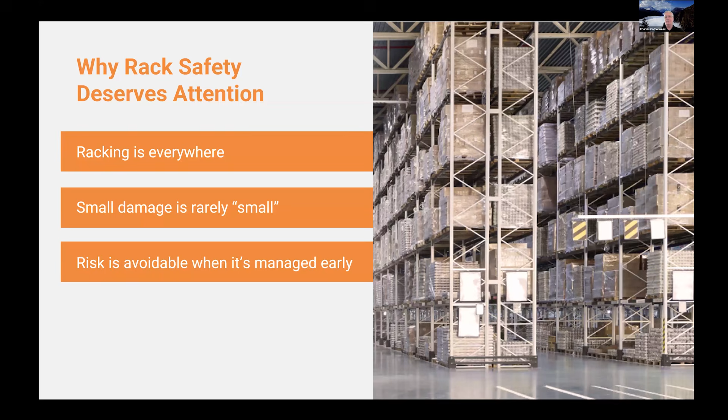And risk is avoidable when it is managed early. So if there's anything you need to remember from this presentation, these three points are the crux of it. At the end, we talk about some of the solutions to this.

Damotech is 37 years now. That's why we say built from 35 years of rack safety expertise. We were established in '89. So decades of real-world inspections. We're the largest rack safety provider in North America.

We sell engineering products for warehouse protection and rack repair. We have engineering services, rack inspections. We do reverse engineering to figure out load capacity, especially for those people who have multiple different types of racks and different manufacturers through the years in their warehousing. No rack manufacturer wants to calculate and provide capacity for its competitor. So we go in - we are not a rack manufacturer - and we have the engineering tools to calculate all of these different systems. We also provide rack safety training.

As I mentioned, there's a thirst for learning more and more about the domain. So the outline of the presentation is truth from the field - this is where you benefit from the 35 years of being in there. A quick reality check, then some of the lessons that we extract from the field, a few key takeaways, and then Q&A. All that in 45 minutes to 1 hour.

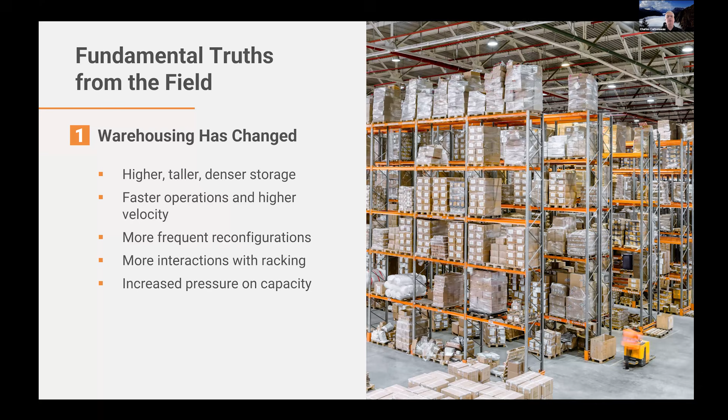So fundamental truths from the field: number one, warehousing has changed. That was really common from our own employees and from the field - things are moving along. Rack systems are higher, taller, denser, with faster operations and higher velocity required of you. More frequent reconfigurations, change of seasons, adaptability of the racking systems to what needs to be stored, more interactions with the racking in the sense that you visit these slots often and faster, and therefore they're exposed to more possibility of damage. Increased pressure on the capacity of the racking system - it's got to be fully available all the time because that's how you plan to use it.

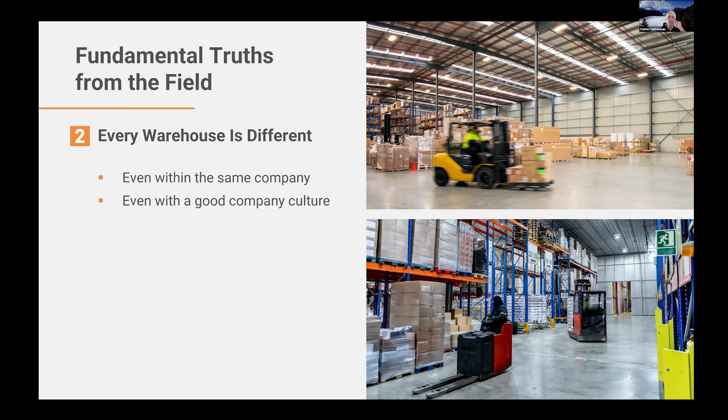Truth number two would be that every warehouse is different. This is something we realized through the years. We can't come to you and say there's only one solution, only one way to approach it. Each warehouse is different, even within the same company. Companies that have a widespread footing in North America, for example, depend sometimes on local culture, different employees, different approaches to safety, different sensibility, also different pressure. So even with a good overall company culture, we can see these differences, and we have to be sensible to the fact that uniformity is almost unattainable on a person-to-person approach.

Truth number three, and we're really going fast - this presentation, by the way, is going to be available as a video, I believe, after we finish. So everything is accelerating. You need to be able to make faster decisions. We have lower tolerance for downtime. If you close an aisle and can't access it, it becomes critical at one point. If it's closed off, it must not be for that long.

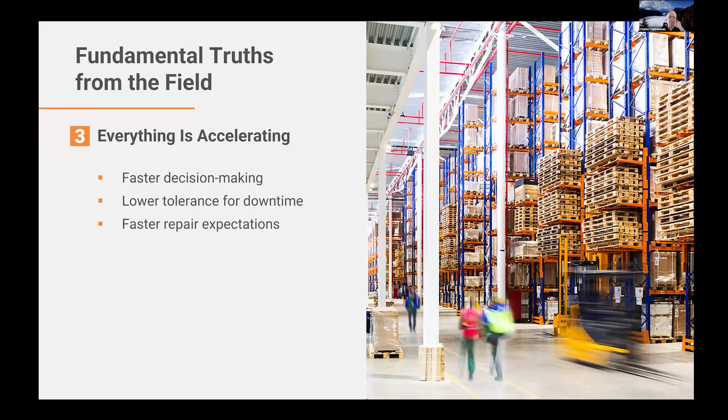And so there's faster repair or replacement expectations, of course. And another really fundamental truth: if you use forklifts, you have rack damage. And even for the ASRS, the automated storage and retrieval systems, we're being asked to inspect those. Sometimes it's more the insurer that wants to make sure everything is safe, and so we do these types of inspections as well.

The conclusion of this is that damage is normal. Even with robots, we can see some damage. A little box that you tried to store twisted somehow, you try to retrieve it, push it into the rack, and you damage the ASRS. And of course, if we have humans driving forklifts, 3,000 pounds of forklift carrying a 2,500-pound pallet, sometimes you don't even feel that you're damaging the rack because you're so heavy.

So damage is normal, and unmanaged damage is dangerous - the accumulation of it. Fundamental truth number five: complacency is expensive. It's easy to say, but we've lived it, we've seen it. Planned maintenance is at least predictable, and emergencies put you in trouble. When you come to work and you're only extinguishing problem after problem, fires left and right, you know you're not in control. This has a cost because you're not doing the other things you should be doing.

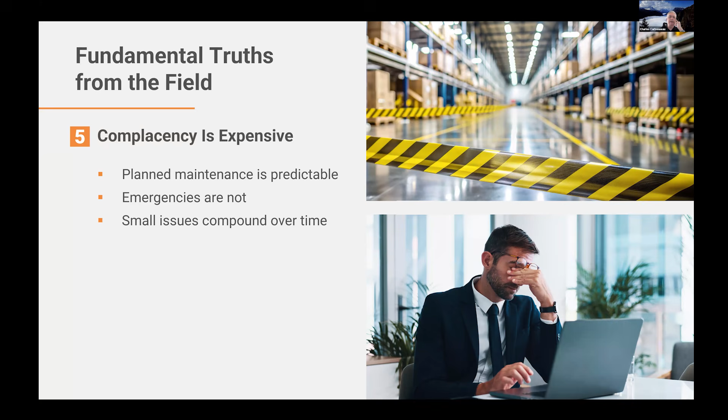So taking hold of not only damage, but conformity of the racking system, you're at peace. Everything's under control, there's a system and it works. Small issues compound over time, definitely.

Truth number six: under pressure, safety culture erodes. And everybody has to agree that it's kind of the first thing that'll be pushed aside. When there's staffing shortages or large turnover, you have to retrain everyone, and you're not going to get the expected results systematically. It's kind of hard to get there, and there's no magic formula for this.

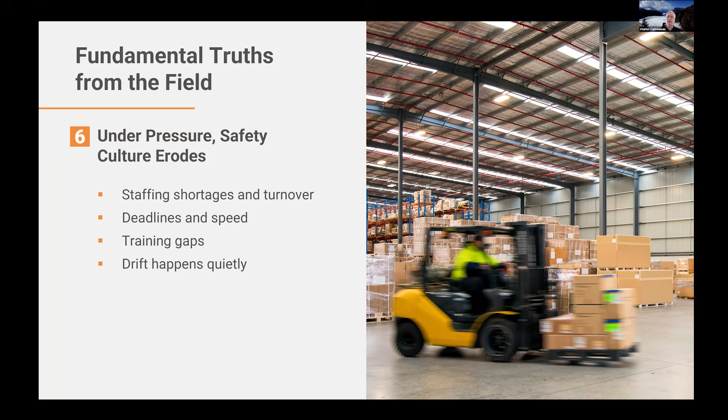Deadlines and speed, of course, put pressure on safety, and I mentioned training gaps - if you have large turnover, that becomes difficult. And drift happens quietly. Meaning, you had a safety meeting one week that was planned, but then there's an urgency the next week, so you push it back, and yeah, there's something else. If two weeks go by and you're not looking into it, well, it kind of gets pushed aside because we have other things to do which are more important.

Number seven: good intentions don't replace a program. So I'm going towards the practical solutions, which is to have a system in place. Right now, a lot of people have damage and need to fix it when they at least know about it, because a lot of the time, if you don't have any system to report it to a manager, they just don't know.

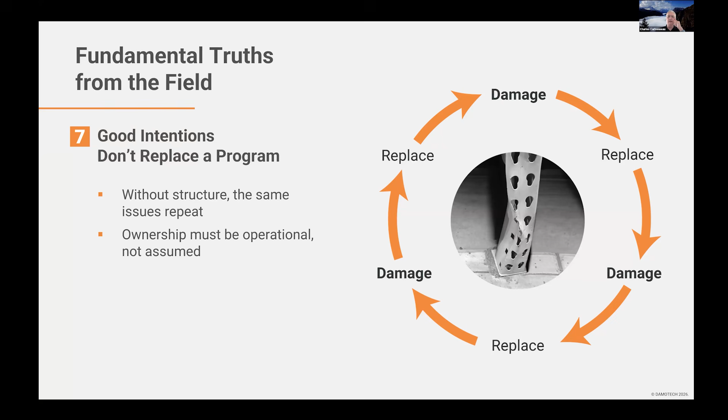So you damage, you replace or repair, you might have damage again, and you replace - damage and replace - and you just spin around. At one point you wonder, didn't we fix this like two months ago? Why is it back? So that's the point: without structure, the same issues simply repeat. And ownership must be operational, not just assumed by the people in place. Because you have to extinguish fires left and right - at one point, is anybody taking care of that? Follow-up is really the missing link.

The nut of the anchors is not tight. So what's going to happen? The rack is not going to fail. There's not much excitement, seismic forces there. So it might be a low priority. In a high seismic zone, it's a high priority suddenly.

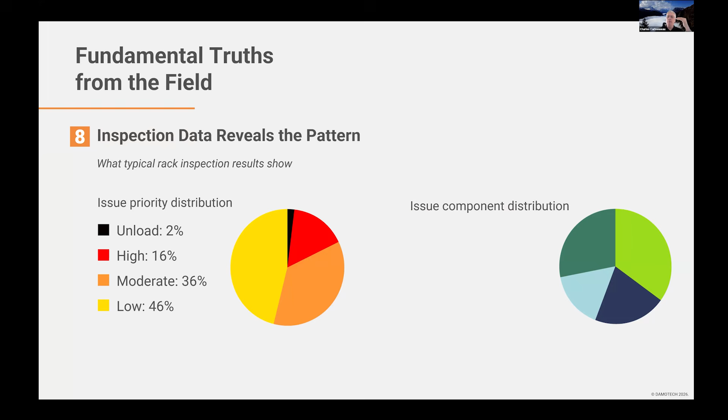So what you're seeing here is overall. Now, in the issue component distribution, braces are a big issue, like 35% of what we see. Then beams, then columns, then the rest. Like the rest could be, like I said, the anchors, or there's some out of plumb on the uprights, or there is some missing safety pins, stuff like that. But when you look at this, 35% braces, 21% beams, and 16% columns, that is kind of the representation.

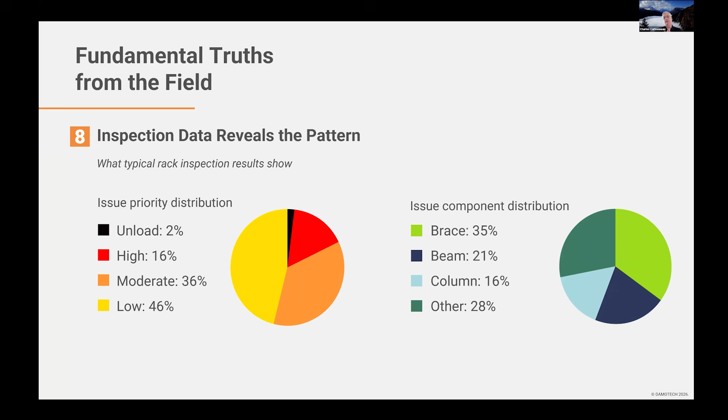of the distribution of these elements within a warehouse. You have many braces in an upright that has only 2 columns, and you have more beams than columns in an upright. So it really talks to the fact that because you have more of them, they're more exposed, and that's why you damage them a little bit more. Now, if you have outriggers and you're using double deep systems, beams get a beating very often. There are solutions to fix that, but you might have a distribution that is higher on the beams.

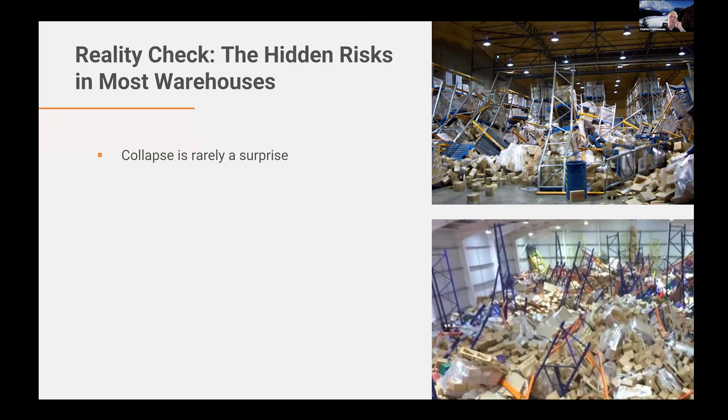So reality check, we show these just to have these images sit in your mind. We don't want to scare everyone with these images, but just want to say that collapse is rarely a surprise. It's the end of a chain of events of damages or whatnot. Those clients that understand it want to break the chain early and say, okay, there's a small damage, I want to stop it here so it never becomes a major failure of the system.

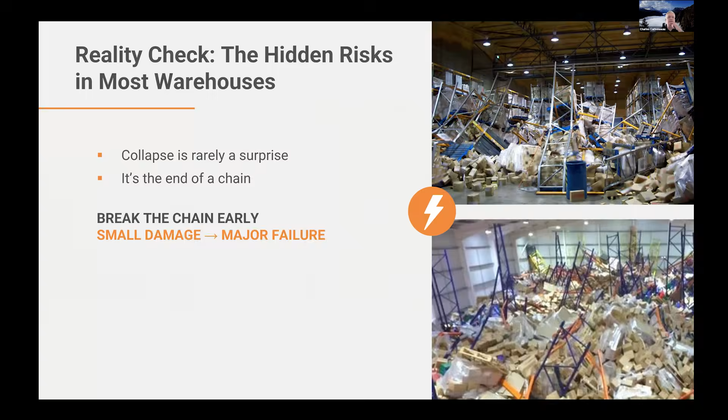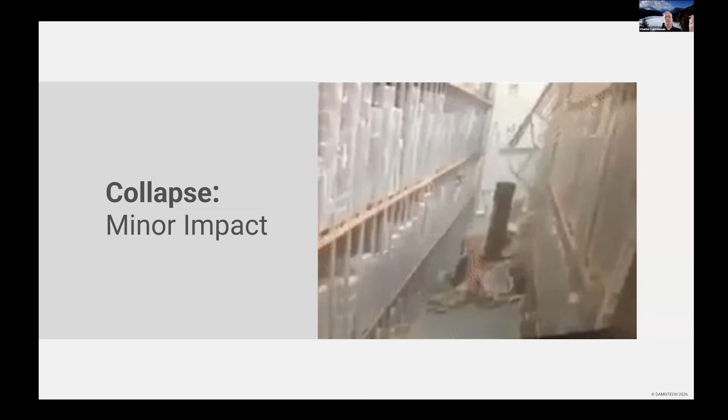So here's an example of a minor impact. Perhaps you've seen those on YouTube, and we share these videos in just about every presentation. Not to scare you, but to say, come on, he just lightly tapped the column. What was wrong with this system? Was it overloaded already? Was it already damaged? So we've got to look not only at damage, but also at the performance of the system. Was it really well designed for the loads that you put in there?

That's a good question. When racks collapse, they fall really vertically. It's not a domino effect. They don't topple each other. They just fall vertically, but then the material falls at the bottom, creating a kind of cone shape. And that hits the bottom legs of the other uprights where there's more load right there. And that's why it's dangerous to have that domino effect.

So here's another one, which is probably one of the worst. Just tapped a beam. So again, you ask these questions, how was this thing designed? That was a horribly bad decision to try and squeeze in between the material that was in the middle there. But the consequence is enormous. And clients who've been through these events tell us, what do I need to do for this to never happen again?

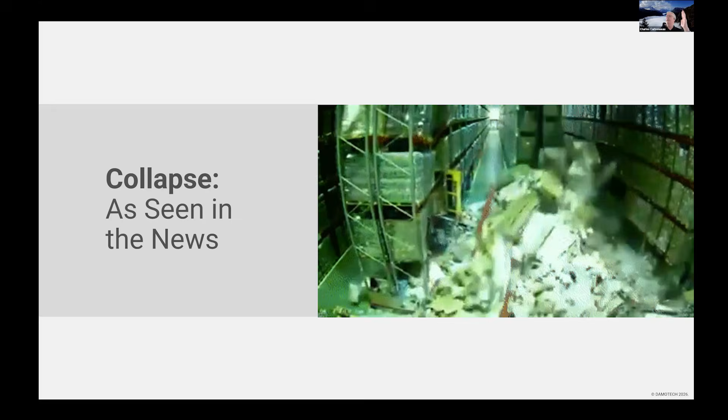Never. I never want to have to count my employees on the floor and have to call in - did he call in sick this morning, we can't find him. And it's horrible. You think of the vibration - you're in your office and the vibration of the floor, you think it's an earthquake, but then you hear shouting, you come out and you see the incredible damage. You've got to get everyone out and you can't go back in to start digging because you're worried that some other systems might fail. So I know this is extreme, doesn't happen that often, but we know how to make these things not happen.

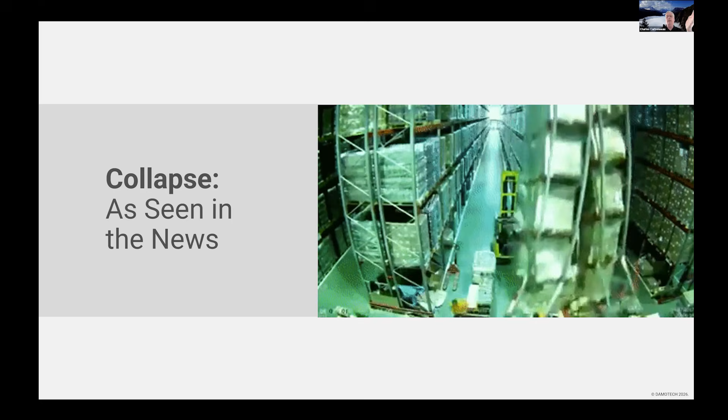This one is a seismic event. You see a guy just running. So he felt the earthquake, just left. And that's pretty good behavior for the system not to collapse. The bulk stayed okay, which is interesting, right? So we also know how to design racks that resist earthquakes.

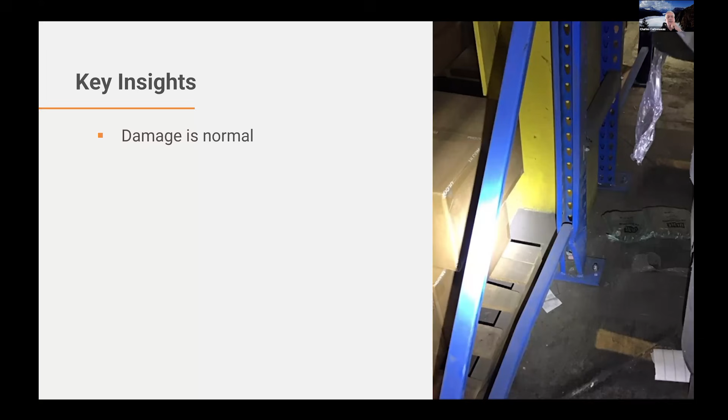So key insights from what we've seen so far is that damage is normal. Unmanaged damage is dangerous, and the real gap is follow-up. So I mentioned damage, damage, damage - we might say nonconformity is dangerous, it's not just damage. So the real gap is follow-up: we understand damage is real, it happens, we just got to be on top of it.

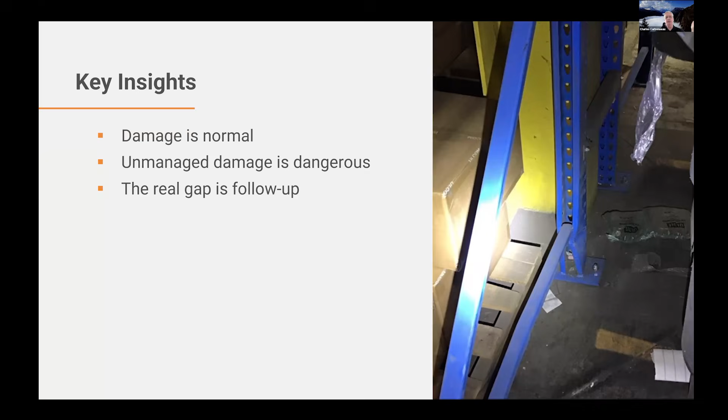So, lessons from the field and common mistakes. Let's dive into some of the experience from these 35 years being in warehousing. Operating with structural damage - deformed columns, beams, and braces, you see here.

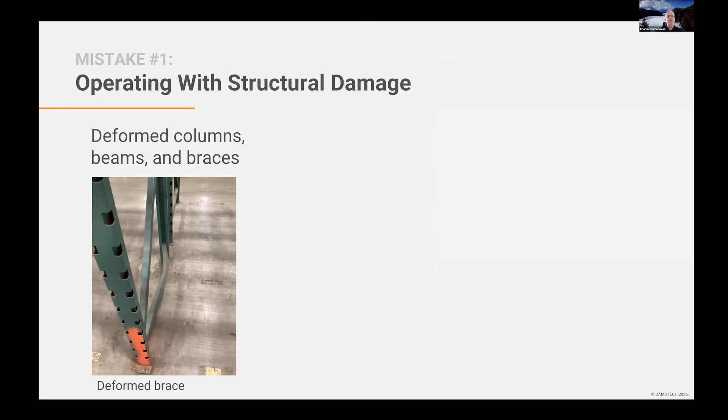Damaged bottom brace - is that super important? It's relative, depends where you are, depends on the system, how it's been designed, how useful this is. You have to know that these horizontal and diagonal bracing system braces, they also provide for vertical capacity. Their presence is super important to provide vertical capacity. Oftentimes I have a little ruler that I just compress - a 12-inch ruler, you compress it, it buckles right away. But you hold it in the middle, and then it's much harder to have it buckle. It's going to buckle as an S shape instead of just a C shape, let's put it that way.

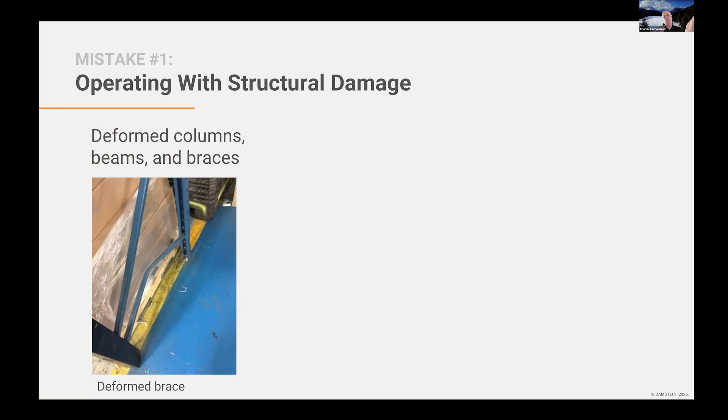So these elements are really important. Once it's deformed like this, and you see it going high like this - did it pull on the column? Is it kind of indicating to the column if you want to collapse? I just gave you an indication on where to collapse. So deformed columns, beams, and braces - you see here an example of a deformed beam. Is it going to have the rack collapse? Nope, nope. But you don't want to receive that pallet on somebody walking in the aisle or anything like that.

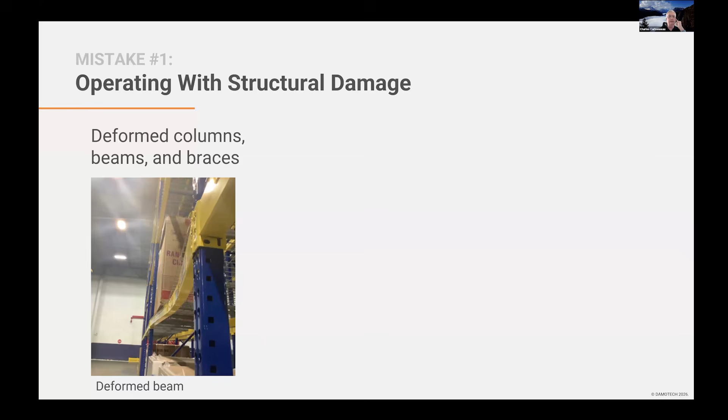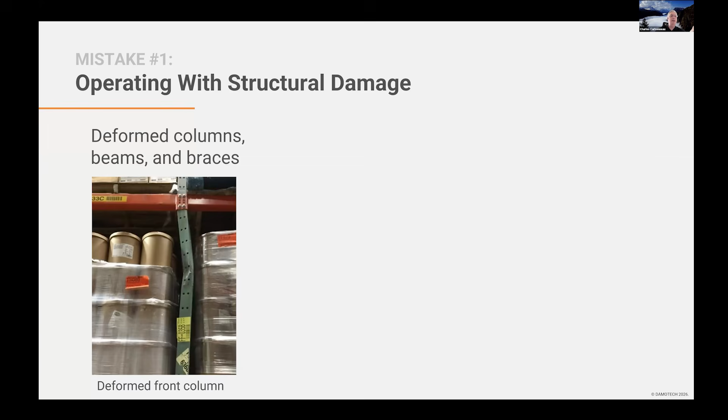This is an example of a deformed column that - I can't believe this. I found this doing an inspection. It was fully loaded with ice cream. Nobody said anything about it. So...

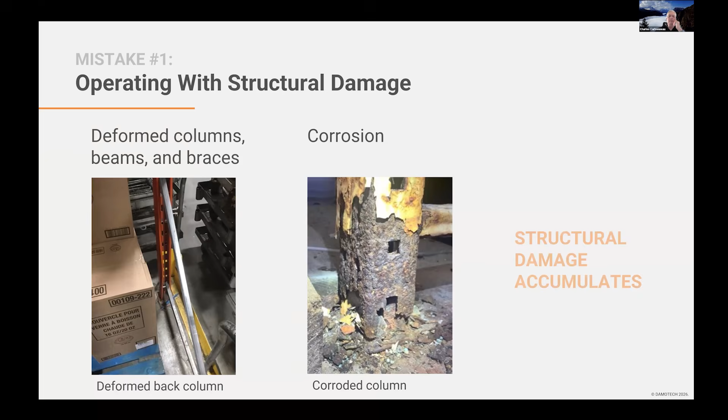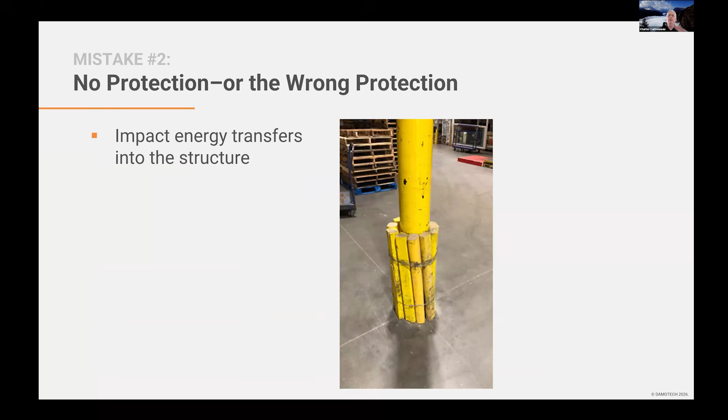Mistake number two: no protection, or the wrong protection. We see these things often. I applaud the effort, but if you hit this, the energy is not going to fully dissipate - the column is going to receive the hit anyway.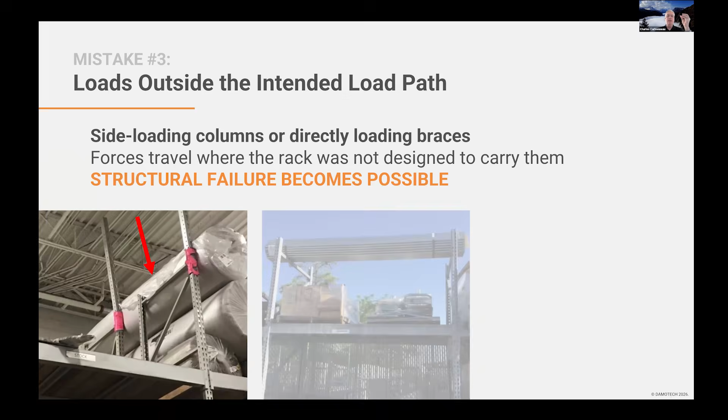In this particular case, you see - I don't know if it's just taped - but they try to put some extensions so that the rug stays in. Yeah, that's not a good indication. This one here, I'm not sure if it was designed for it because the horizontal brace looks pretty stiff, but it's really rare that we would allow this. You would use a cantilever rack to support that type of load. So that's questionable - I'm not saying it's wrong, it's just usually wrong because I don't hear a lot about engineers designing for that kind of loading.

So you've got to maintain paperwork that says it's okay. This one on the right is totally wrong - just by the deformation, it's wrong, wrong, wrong. And even attaching anything of that kind of weight to the upright is wrong.

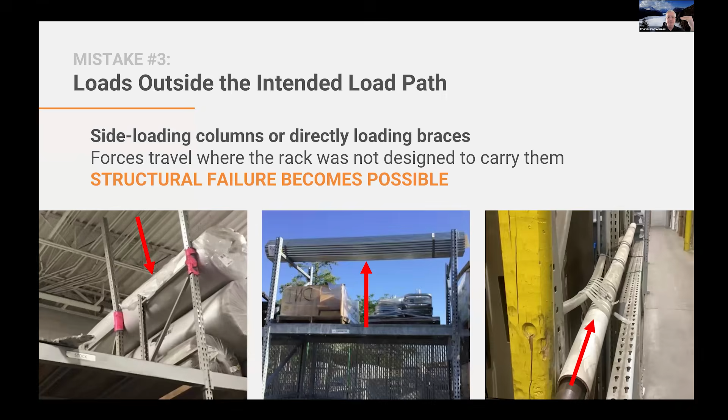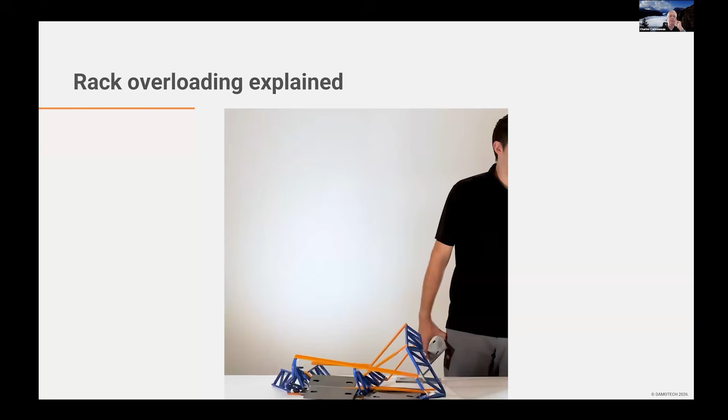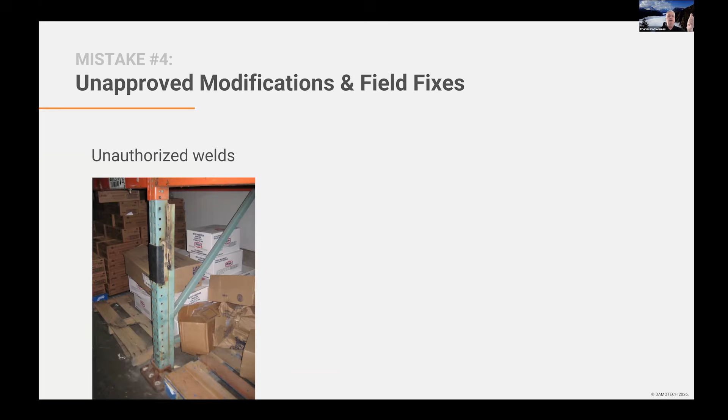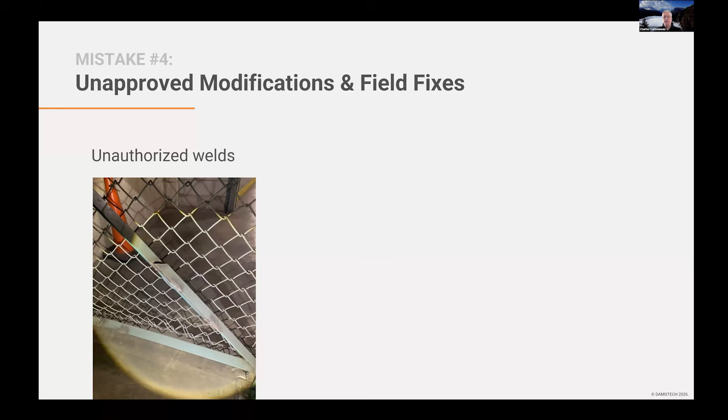Another example, these are two L-shaped braces that are welded together. An engineer would not design this. We have rack repair guidelines that say it's got to be engineered, it's got to be supervised. This is not the case.

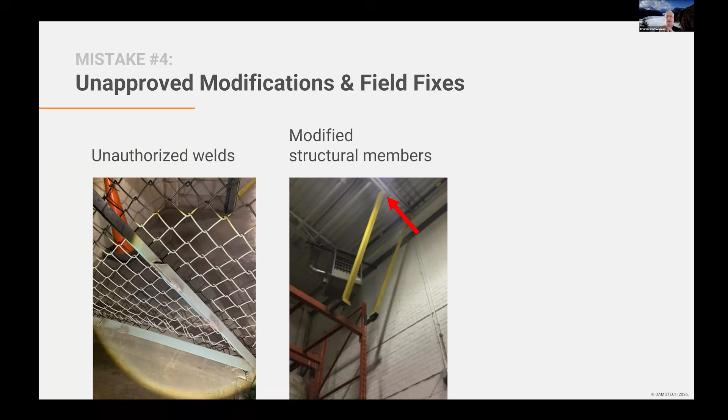Attaching a rack to the building, in this case, attaching to a roof truss - what happens if the rack collapses and pulls down on the roof? Well, then it's a much bigger incident, right? If the roof comes down with the rack, so of course, never recommended. Attaching the rack to anything, if it's not been designed for this, or the building has not been designed for this, we shouldn't do it.

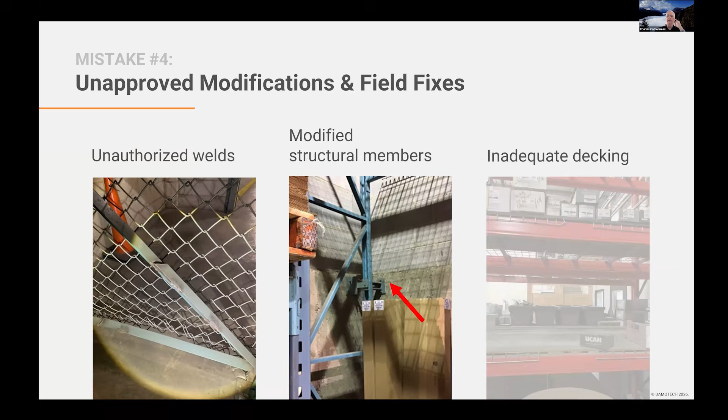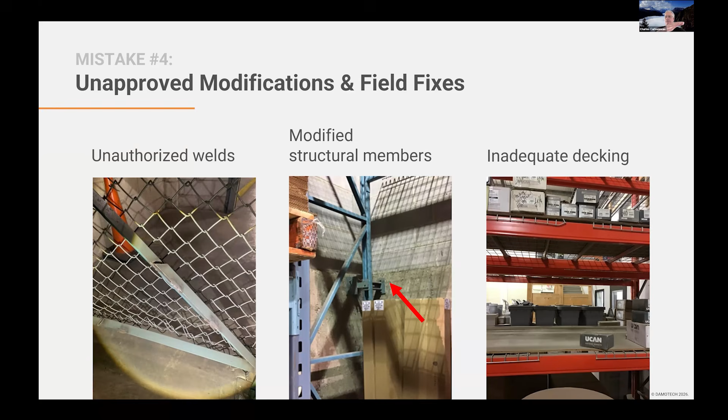Inadequate deck, that's a minor issue, but it's questionable. Why, what's happening? In this case, you see there's a gap between the two wire meshes, and there's a wood plank. So just on top of it, is it fixed? Can it slide off? How does it work? These are the kind of issues that we see and we try to prevent.

Some more modifications and field fixes. If the clearance between the pallets - and I don't know if you see it, there's a white tube right here - it's very questionable when you raise that pallet here, which looks like a pallet on top of a pallet. Do you not hit this thing? What's the clearance with it? Maybe I would just condemn that portion of the rack.

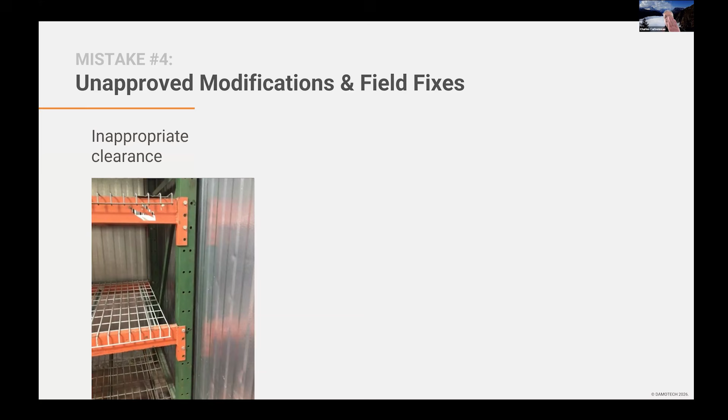Proximity or clearance to the building also, because during a seismic event, you would just hit the building. What's on the other side? What's the consequence? Those are the things that we have to check. It's not a damage per se, but it is an issue.

Same issue over here, sprinklers attached to the rack. So if the sprinkler designer did not take into consideration that these racks move a lot during a seismic event - down aisle especially, there's a lot of movement - if that movement breaks the connection and then water doesn't get to the other locations where you need it during a fire, well, we're all screwed.

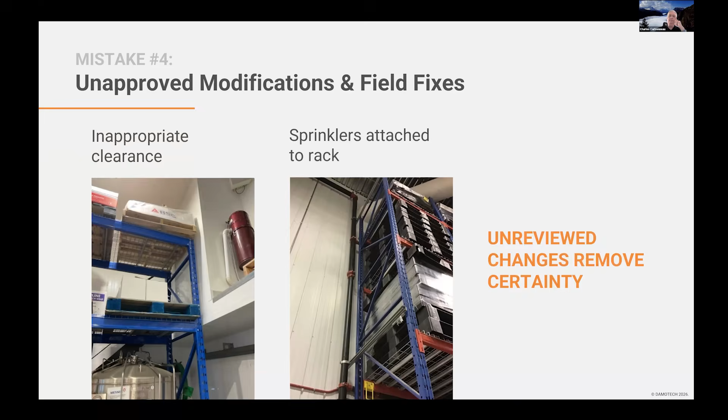Mistake number 5, reconfiguring without engineering approval. So in this particular case, in this image here, I would question this connector to the left, right? Because it's got teeth, and these teeth are not entering into these slots over here. So that's kind of a strange operational way. I think they put some bolts through, but it doesn't seem to be the right connector.

Mind you, you have to think it's not only gravity loads, it's also the down-aisle behavior of that rack system that we have to take into account. So similar parts doesn't mean you have exactly the same capacity. And we say that because if you replace an upright which had a gauge of 13 and you replace with a gauge of 14 - a gauge of 13 is 0.09 inch thick and 14 gauge is 0.074-ish - well, it's not the same capacity anymore.

And it looks exactly the same, it's just not the same thickness. So that's why we have a rack repair guideline on rack repair or replacement, because the same requirements are for replacement. You just got to make sure it's the right upright that you replace. And by the way, when we do our inspections, we go to that level of detail of checking the gauge of these columns, and we find all kinds of differences. That might be one slide I should add, the things that we find out there.

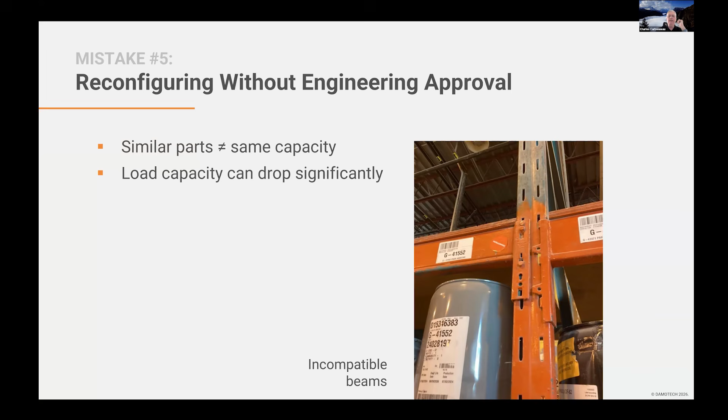So load capacity can drop significantly. We have to verify, of course, before loading. We should make sure if you make a change - for example here, we wanted to move the beams 12 inches or 18 inches higher, and that comes with 33% less capacity when we do the calcs, which is significant, right? If you had kept your 4,500-pound pallet, it would have collapsed, perhaps. I say perhaps because yes, we do have safety factors, but they're not there to protect you against these kind of mistakes.

They are there to protect us against the fact that material might not be perfect. When you roll these shapes, either hot rolled or cold formed, they're not perfect. So as soon as you load them, they have a tendency to move laterally and side sway slightly. We take these things into account. We have factors that limit the capacity for those reasons. It's not that I don't want to do the calcs, it's got to be done.

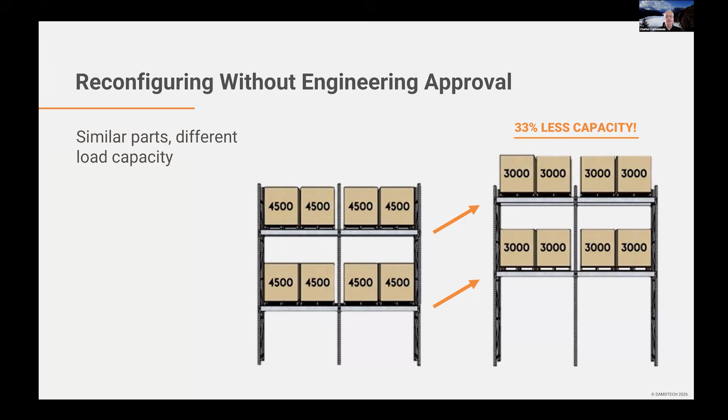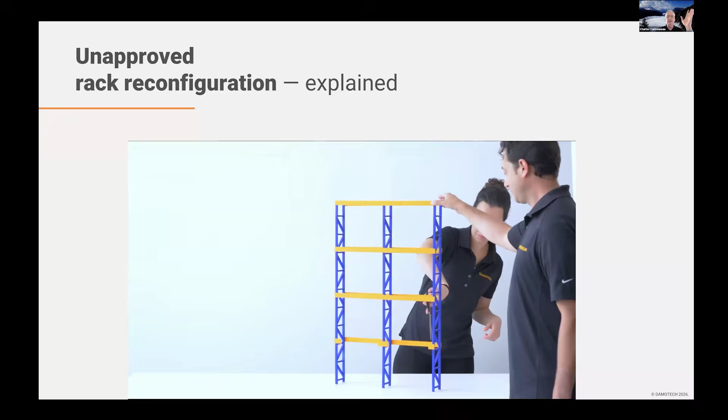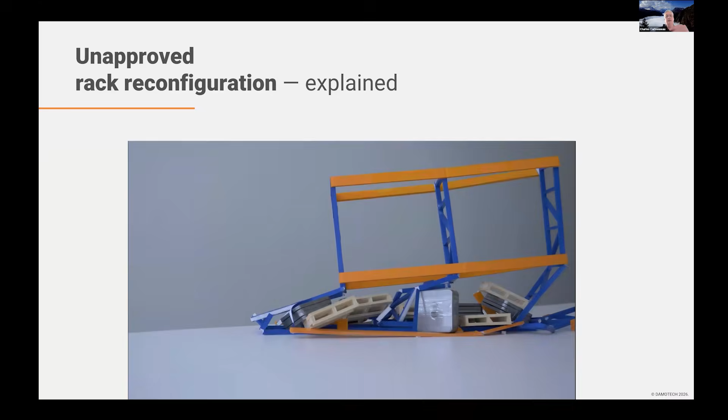So, unapproved rack reconfiguration explained. We say explained because the image is worth 1,000 words. What we do here is we load it up completely, you saw that. Now we remove one beam level and we try, I say try, to reload it. But my colleagues got to hold it because it wants to go so bad. We could feel it just after putting one level. So doubling that non-supported length below the first beam, which is now the second beam elevation, that actually diminished the capacity of the rack by a factor of 4. It punishes you badly.

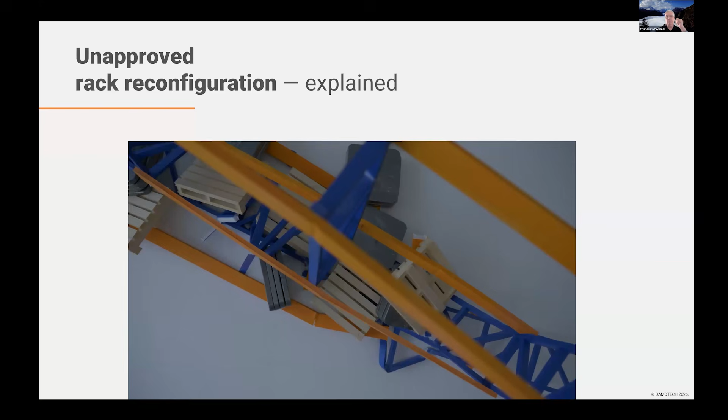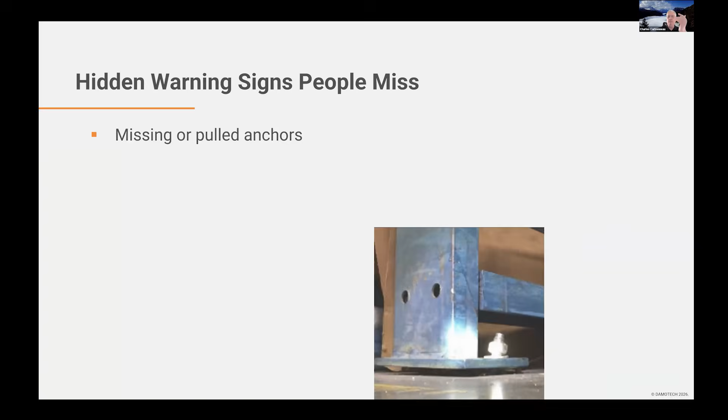So other hidden warning signs people might miss: missing or pulled anchors. So like this, how come the column is not touching the ground? Was there an impact previously? Is it loaded or not?

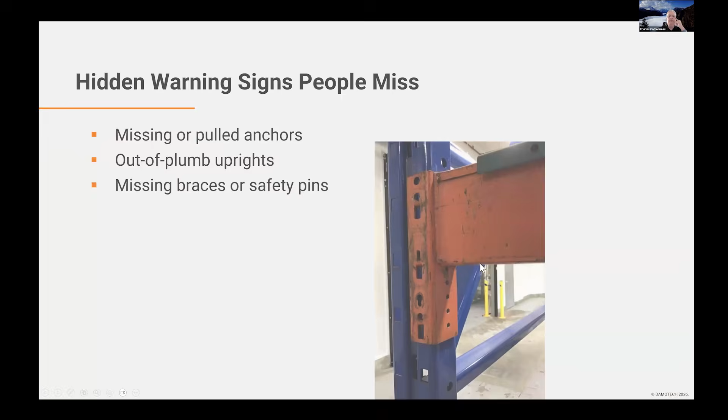So I just zoomed in over here to show you. It used to be here, there used to be welds right here. So it's definitely not normal. Missing braces or safety pins, we see that a lot. And it's an easy fix, just go in and fix those as fast as possible.

This is an automated safety pin. It's spring loaded, kind of, and it was broken on this side, to the left. And the consequence is that a beam can partially detach, like in this case. This is really dangerous because you're not held with all of the teeth that should be into the column.

Damaged connectors or shims, these are all other indications, and when we do a full in-depth inspection, we look for those as well. And so we get to best practices.

I think we're pretty good on time. Yeah. So what does OSHA say about what needs to be done, right?

It's not just OSHA, it's also workplace safety. And across North America, I know it's uniform. The wording is: employers must maintain a safe working environment. Rather boring, not very detailed, but it's got a lot of meaning to it, and we got to be careful about what it really means. So we know that for racking, this translates into: improper racking use, selection, installation, or maintenance increases the risk of worker injury. We have all these racks, they're kind of a commodity because what we operate is the warehouse, the stuff that we put in and that we need to ship out. That's the focus.

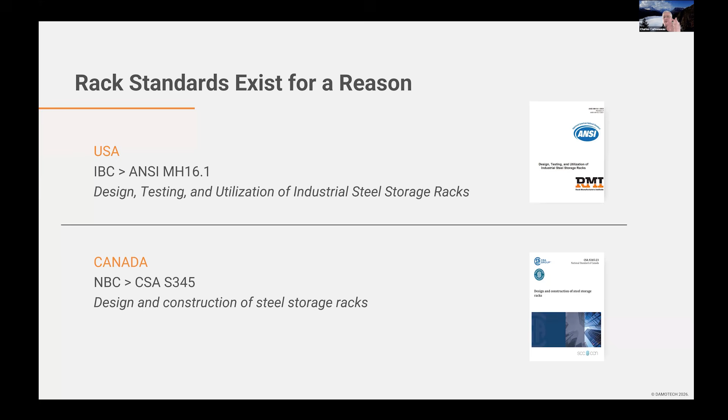So rack standards exist for a reason. In the US, the IBC, the International Building Code, refers to ANSI MH 16.1, which is the design, testing, and utilization of industrial steel storage racks. So you have racks, here's a standard on how to design them, right? In Canada, the National Building Code refers to CSA S345, which is design and construction of steel storage racks. Same thing, right? Different path of being created. This one, latest version 2023, and so is MH 16.1.

So the true cost of rack safety issues is to think about the people, of course. We don't want anyone to get hurt. That's obvious. But operations might be affected, and not necessarily talking about collapse here. Operations are affected if I need to cordon off certain rack slots, pallet slots. Inventory capacity is going to be affected, of course.

And if I'm not compliant, somebody from OSHA might come in and say, well, this doesn't look good to me. So you get someone in and you fix everything that needs to be fixed. They're not going to be able to inspect the whole thing for sure, but they are made aware of these more and more. So they had recently a program where they wanted to focus, because the warehousing industry has more incidents apparently than other industries. And that might be related more to forklift use, but rack damage is part of the whole deal.

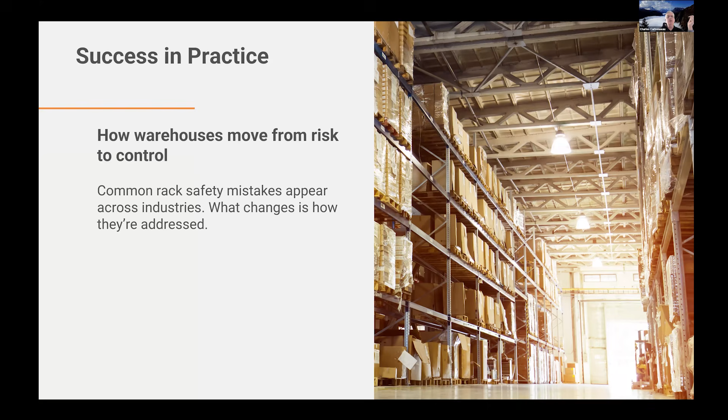So success in practice. What we've seen that works, so how warehouses move from risk to control. Common rack safety mistakes appear across industries. We've established that. What changes is how they are addressed. So we're getting to the solutions now.

So how a food distributor gained control. This is a client of ours, one of which that says never again. And so we proceeded with baseline inspections of all our facilities. So these are engineers, and as we were doing it, they were kind of gaining a better understanding, seeing the reports and what we're reporting. They're kind of learning, oh, that's important, okay, that's important. And at one point, they get the hang of it and they can go ahead of us to try and fix these things all across their warehouses.

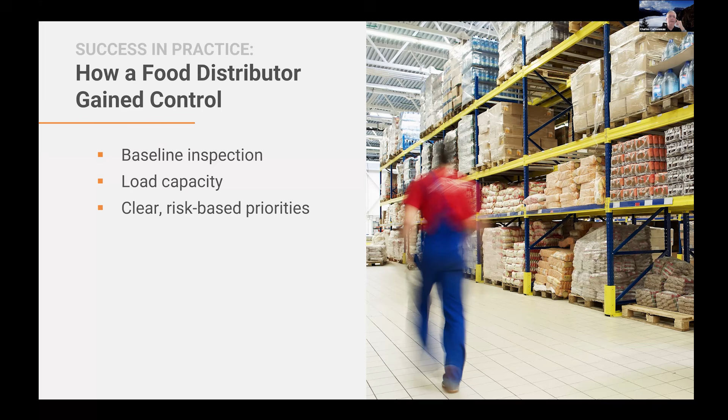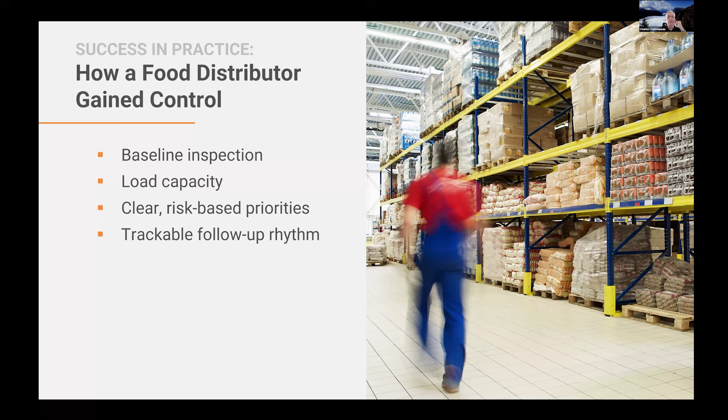Load capacity was not displayed on the racks. That's a problem. It has to be if you want to conform to the design standards and prove that you're in control of your capacities. You have to establish clear risk-based priorities, and this is what we do during our engineering services. Trackable follow-up rhythm, so you get into the habit of repairing and tracking and whatnot.

So another success in practice, speed wins in big box retail. Fast risk-based prioritization helps a lot. Then you get into the habit of doing fast repair executions. Some of our clients say it's got to be fixed within a month. Then COVID happened and there were all kinds of difficulties getting materials. But after COVID, they pushed the envelope to say, no, it's got to be fixed. Let's gear up to make execution really, really quick. And in doing that, the risk is reduced week by week.

At one point, you're just running the system, but there are no big surprises anymore. Oh, there's a big damage. I hit it, wrong pedal on the forklift. I backed into it really hard. We were lucky that nothing failed. We unloaded. We know what to do, right? It's not a big deal anymore. We're used to it.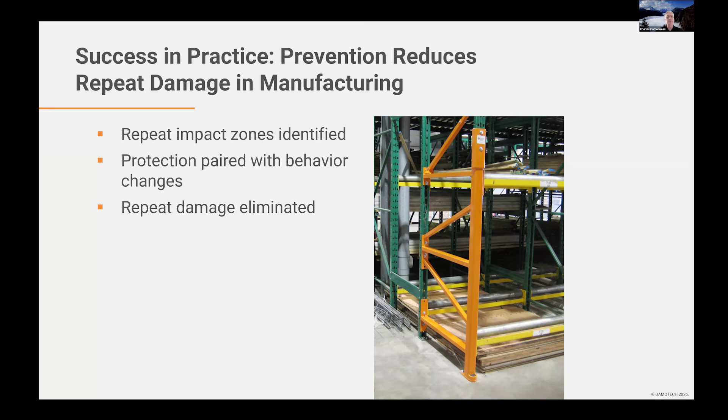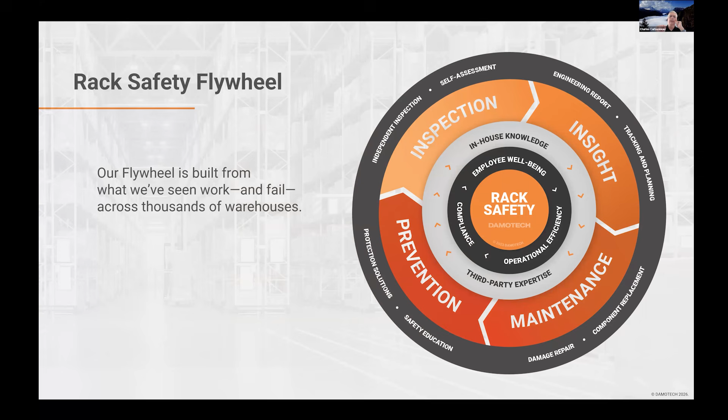So what does a complete rack safety program require? I'm going to go through this rather fast: inspection, insight, maintenance, prevention, internal knowledge, and external expertise that you can use for it. We baked all of these elements into what we call the rack safety flywheel. It's a flywheel because you can come into different locations in this flywheel, but as you put some weight onto these elements, it starts to roll.

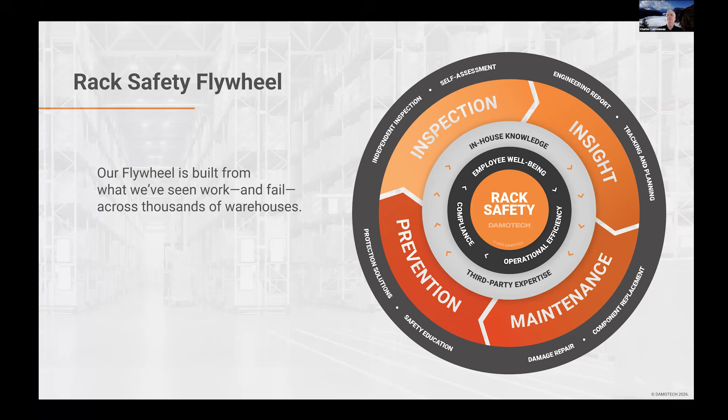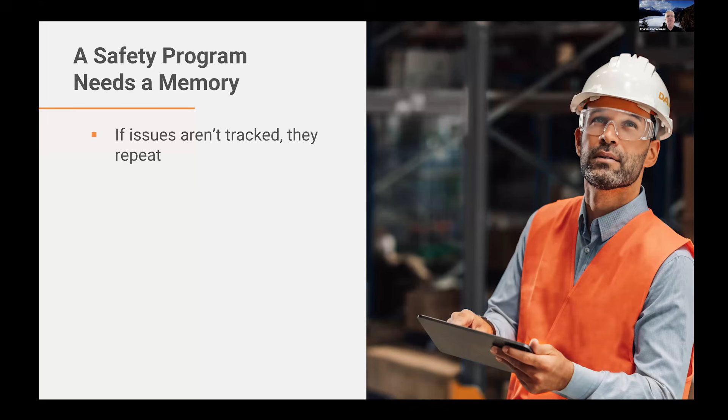This is what I've been trying to hint at, that this is what we found that works. It's a system that is clearly identified, but every time you put the shoulder to the wheel, it gains momentum, and at one point it just becomes habit. So a safety program also needs a memory. If issues are tracked, they don't repeat, but turnover resets progress in undocumented programs. This is all leading to the fact that you need a system, and site history matters.

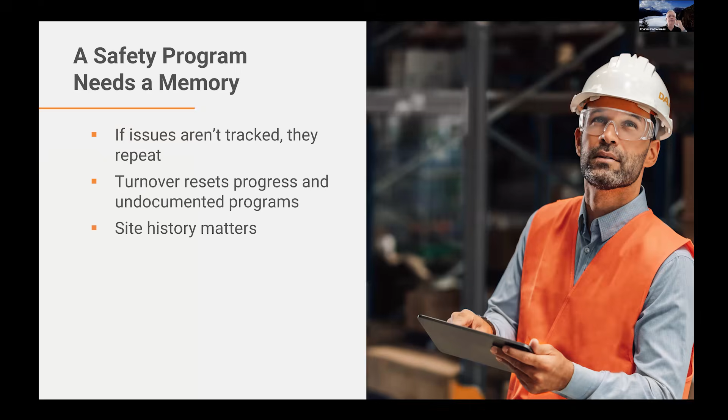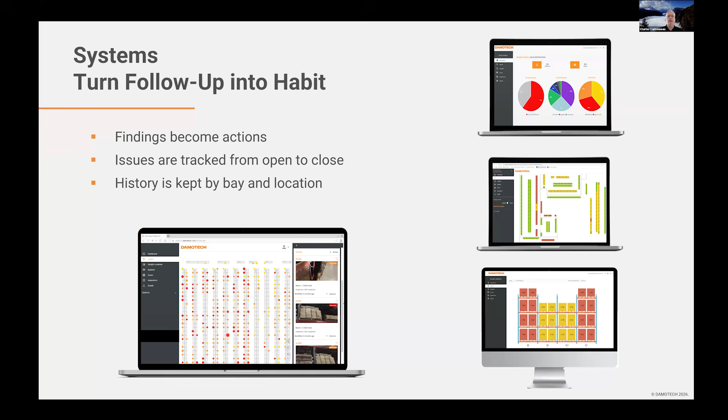So of course we have developed such a tool because of what we uncovered during these 35 years. Findings become actions automatically. Issues are tracked from open to close. History is kept by bay and location, so you can go back and see what happened the last time.

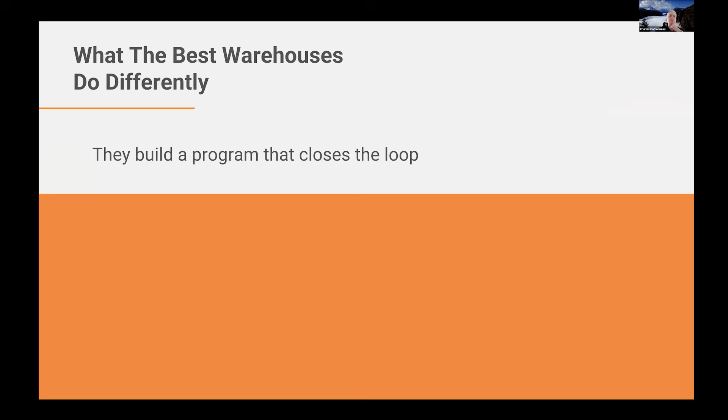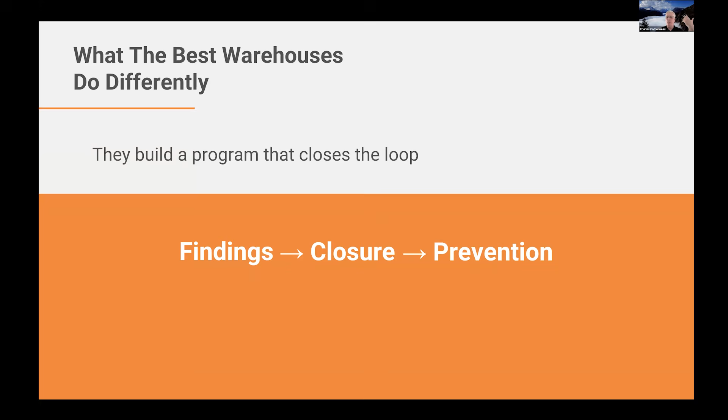So what do the best warehouses do differently? They build a program that closes that loop. They do the inspections, then you have findings, then you solve them, you get closure on these issues, and then you think about prevention. Is this something that we can prevent? What's the cost of protecting perhaps these assets? Do we need to do it all over or just localized? You get more time to think about these things because most of the others have a process in place that fixes it.

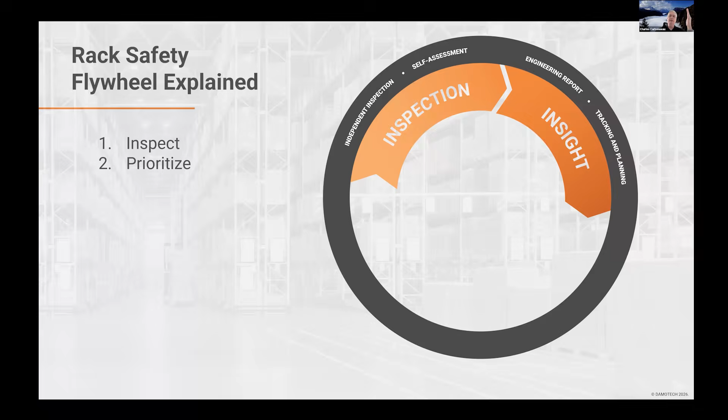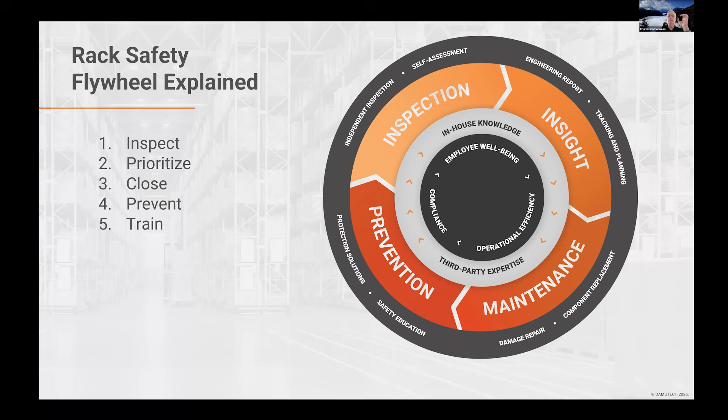So if I was to explain the flywheel, there's no particular order, but if we go from something that feels logical: you inspect stuff, you get insight so you can prioritize what you need to do. You actually do it and close these issues. And then you can think about prevention to limit these issues that could come again and again. You train your personnel, perhaps you use third-party expertise to build some more momentum. And then you get to the core of what you're trying to accomplish, which is employee well-being. I need compliance to design standards, and I want operational efficiency. That is rack safety to us.

So some key takeaways, only a few slides on this, and it tells really the truths that we've seen out there. So we conclude that damage is inevitable, but collapse is really optional.

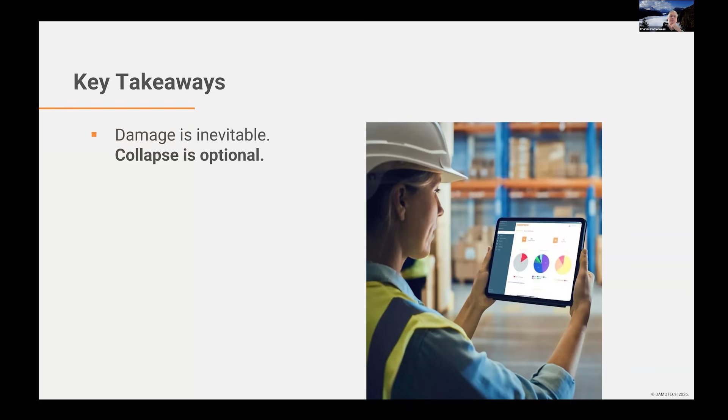It becomes a choice at one point. Safety scales with systems, not only with good intentions or individual heroics. These are insufficient. When you have employee turnover, or you had one great guy who knows everything, transferring all of that knowledge, if it's not in the system, we've seen that it tends to dissipate.

We initially talked about having a culture of safety, big words. Very nice, a culture of safety. Yeah, but try to implement a culture of safety.

It takes years. It's difficult. One example I was saying: if you had to go to work and you're running a bit late, did you fully respect the speed limit? A culture of safety says, yes, I did. I did not go 1 mile above the limit, right? On a personal level, we all have these situations in our head where we say, well, I chose this because, and I've got a reason why I didn't do it.

We always reason in our heads why we didn't do it. But when it's a program, when there's a calendar, there are things to do, and we have to do them, and we maintain not pressure, but a push that definitely comes from high above in the industry, in the business, that we want to do it, and there are reports to be made, well then it gets done.

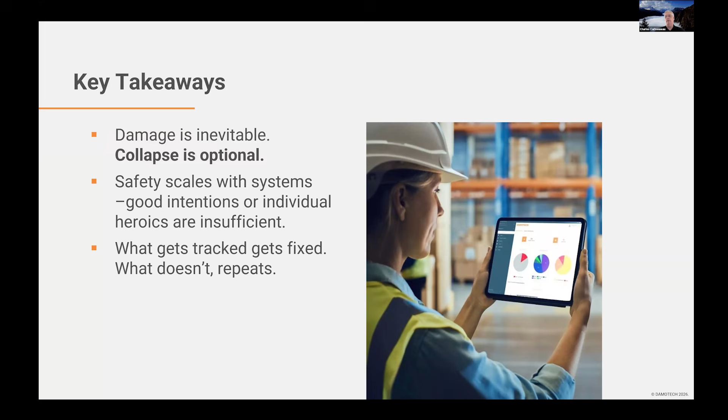One last point here: what gets tracked gets fixed, and what doesn't just repeats, which is a fundamental truth, not only for rack safety, of course.

So we have integrated solutions, and we present ourselves as wanting to be a rack safety partner. Your focus is execution of the warehouse. Our focus is this portion of helping you be on top of rack safety, that commodity you never have enough time to look into. We take that pain away. We have integrated solutions, and we're the largest provider in North America of products and services in rack safety.

Engineering expertise includes compliance inspections and load capacity calculations, where we start from scratch. We go in and measure everything. You might think it costs a lot, but it's really impressive. We've developed incredible tools to go fast and do it with a level of detail I've never seen any engineering firm achieve. I'm not kidding, I've never seen an engineering firm take the time to look at it this closely. And of course, we develop our own tools and training for that, so that when you trust Damotech with your inspections, it comes with uniformity of inspection across different facilities.